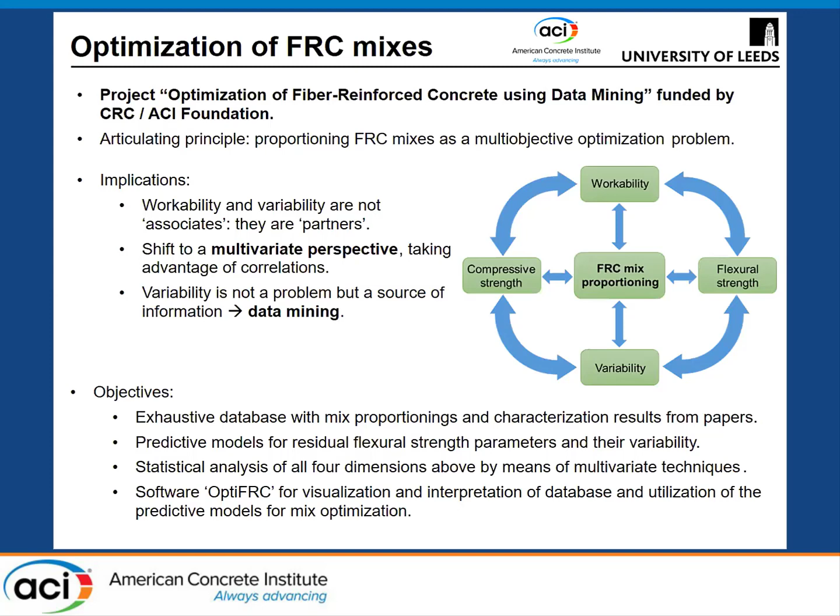The first objective was to compile information regarding mix proportions and their properties from previously published papers, and then use that information to derive predictive models, relating the residual flexural strength parameters of fiber-reinforced concrete and their variability to the proportioning of the mix. We can statistically analyze these dimensions together and derive models embedded in software that the final user can use as an optimization tool, but also as a learning or visualization tool to understand how mix proportioning and different FRC mixes work in terms of their properties and variability.

The outline of the project follows these objectives presented in the previous slides. Here's a flow chart: basically we dig up different published papers that have information about concrete mixes and their properties, and put that into an organized, consistent, coherent database. There's a lot of data mining and preparation going on to ensure consistency.

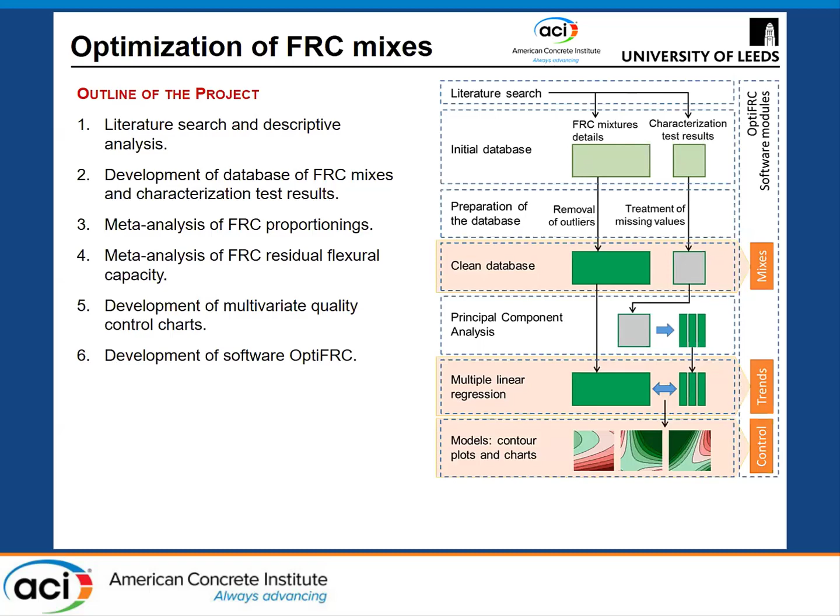We prepare the database, clean it, and once we have the clean final version, we start analyzing to obtain models that can be used for prediction as well as quality control and interpretation of general trends. The database collected for this project has been organized as different variables in parallel.

We have what I call the mix proportioning variables, such as cement content, superplasticizer, type of fibers, fiber content, length, and diameter. These properties define not only the relative amount of different constituents of the mix, but also their main descriptors—for example, the maximum aggregate size, the length and aspect ratio of the fibers, and the type of cement in a certain mix. All those are mix proportioning variables.

For each entry in the database, we also have variables related to properties—slump, compressive strength, residual flexural strength parameters. I've organized the database into two data sets: one for steel fiber reinforced concrete mixes, and the other for synthetic FRC mixes.

As you can see here, we have nearly 2,000 almost-complete cases of information regarding different mixes and their properties. There's a lot of variability going on, and that's when you can start capitalizing on that variability to extract information. That was the introduction to the project and why I'm calling this statistical learning.

In the next few slides, I'll show examples of modeling the relationships between the mix proportioning variables, because the first thing we need to do in data science, analytics, or artificial intelligence is understand the data we have. Before jumping to the main objective—predicting the properties of the mix based on its proportioning—I wanted to look at what the different types of mixes in the database look like.

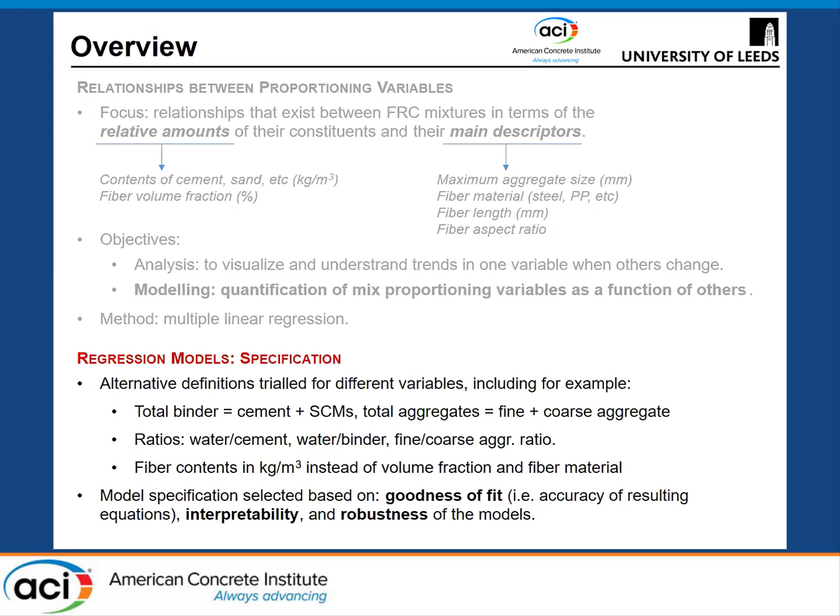That's also key. And in terms of robustness, we need to derive equations that are robust in terms of how they behave when we use different data other than what we used to derive the models. So looking at those three things, I started looking at different relationships that we could try to predict in the mix.

And the first one is the coarse to fine aggregate ratio. Why? Because I thought it's quite a good proxy to the grading of the aggregates in the mix, and that has a huge impact on the fresh performance, something we don't think about enough when it comes to fiber reinforced concrete.

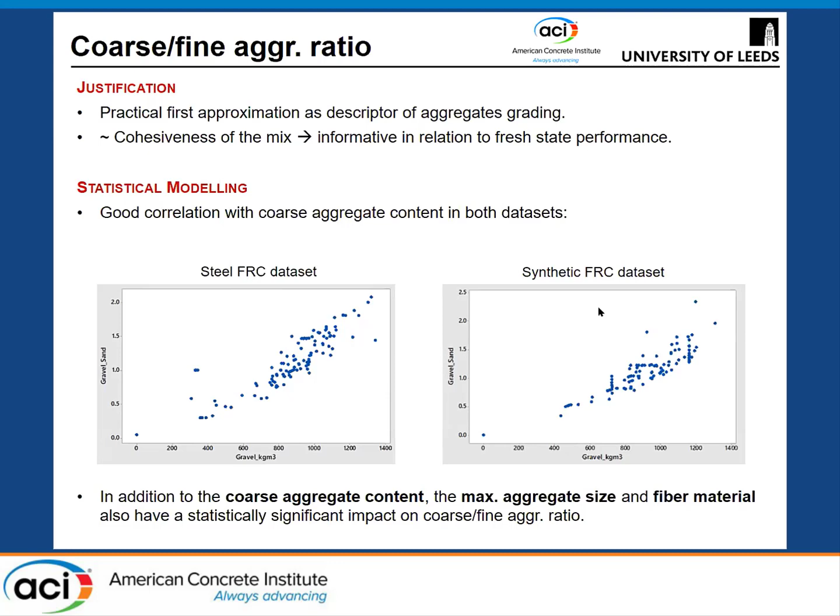If one plots the coarse to fine aggregate ratio in the database with respect to the gravel, with respect to coarse aggregate contents, you can see there was a very clear correlation, suspiciously clear correlation, just looking at the scatter plots. It's also affected by the maximum aggregate size and the fiber material in the mix.

So the regression analysis yielded these two very simple equations, which are actually very accurate, able to predict the coarse to fine aggregate ratio as a function of the maximum aggregate size, the coarse aggregate content, and also the type of fiber, since the equation is slightly different.

And then you can start producing plots like this, where you can try to explain why the mixes vary in this or that way, or why the people who have proportioned these mixes made those decisions, for example decreasing or increasing this parameter when we have different sizes of aggregates.

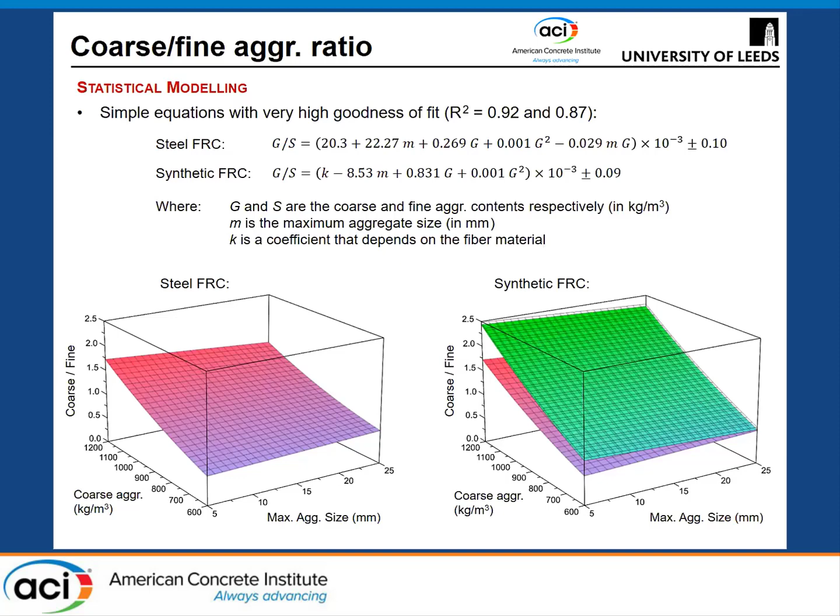Then, after looking at the coarse to fine aggregate ratio, it was also important to look at the total aggregates content. Rather than the total aggregates content, it worked better from the point of view of regression analysis, in terms of producing more stable and robust models, to use the coarse aggregate content.

And again, a regression equation was fitted to try to obtain the coarse aggregate contents as a function of the maximum aggregate size and the properties of the fibers in terms of their sizes and so on. Okay, fantastic. Thank you.

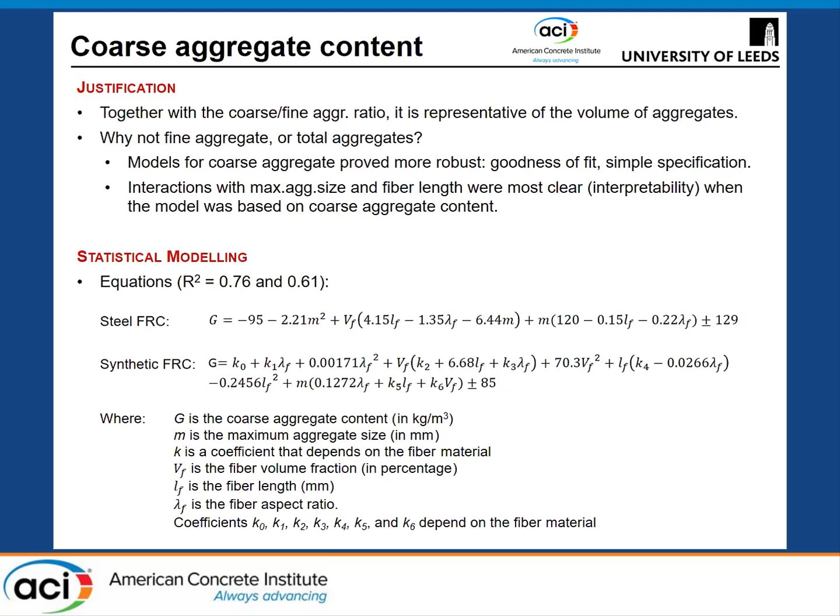With this model, you can obtain very interesting plots like this, where you can see a bit the trends that each—for example, this shows the coarse aggregate content depending on the fiber volume fraction and the fiber length.

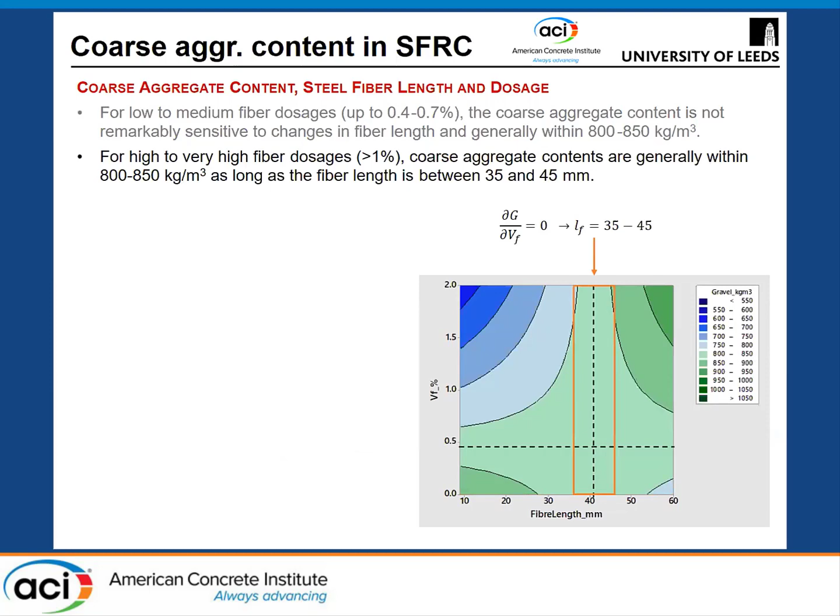There's different conclusions you can obtain by looking at these contour plots—I'm going to skip this part because I don't want to spend a lot of time, but again this is related to the interpretability.

Finally, we did the same with the binder content, trying to predict the binder content as a function of the other parameters in the mix. We obtained equations that were very, very accurate in terms of fitting the database.

Again, it's important to remember that these R-squared values look high, but this is even more significant when you consider that you're probably talking about mixes obtained from more than 100 different papers produced by different authors, and they are relatively simple.

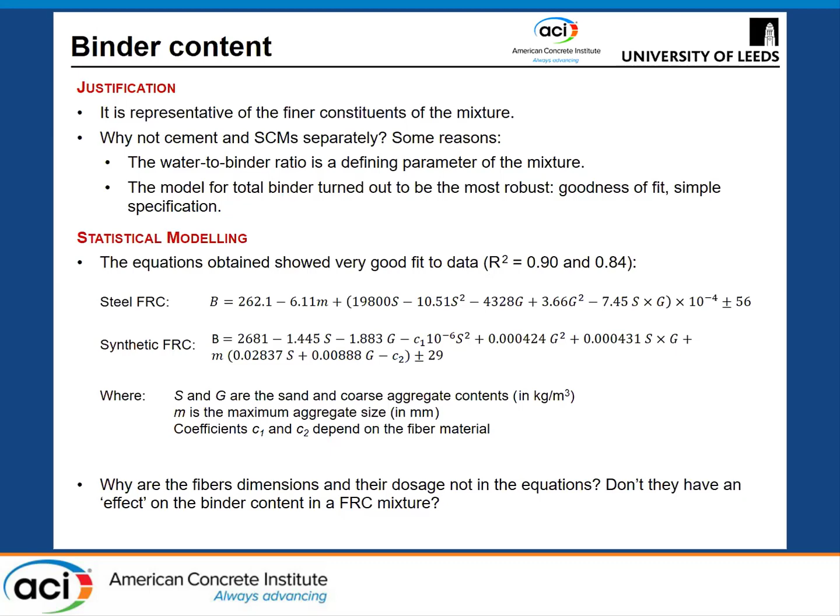So this is very powerful. But then in terms of the binder content, it was also interesting to see that the fibers were not in the equations explicitly, but the binder content was a function of the coarse aggregate content.

So in a way, when we organize these three equations that I've just told you about, you have one equation which, based on the maximum aggregate size and the size and dosage of the fibers, gives you the coarse aggregate content.

Then you have another equation that gives you the coarse to fine aggregate ratio. So based on those two parameters, you can directly obtain the sand content.

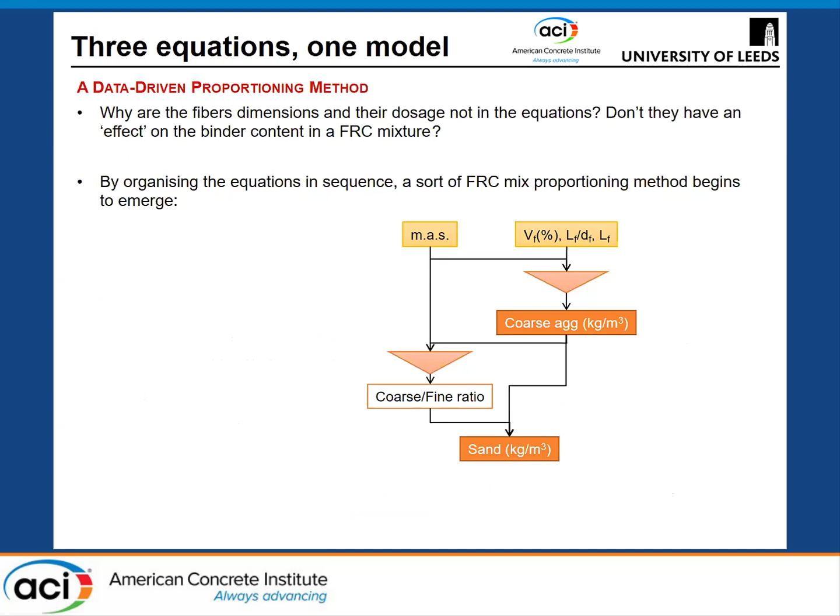And once you have these two, using the third equation that I presented to you, you can obtain the binder content. And you can see that the fibers affect the coarse aggregate and sand contents, which in turn affect the binder.

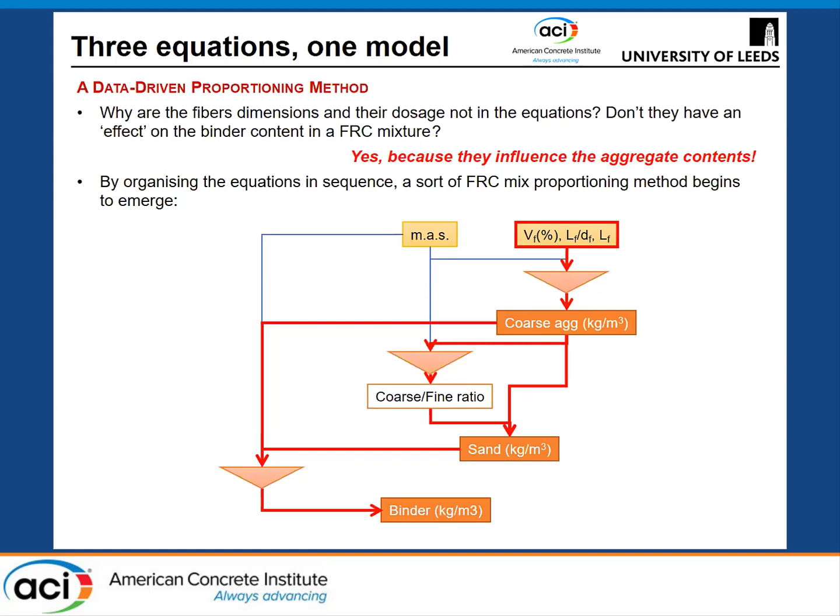So yes, they are influencing the aggregate contents. I'm going to try to cover these slides in 2 minutes, so I'll probably skip a few of them because I'm conscious of the time.

The next step was to try and relate that information about the proportioning of the mixes with the properties, focusing on the flexural strength only. It was important to pay attention to the interactions between the different variables.

It took us quite a long time to get to formulate an equation like this. Basically, we have 4 different residual flexural strength parameters, and we obtained the same format of equation for all 4 of them.

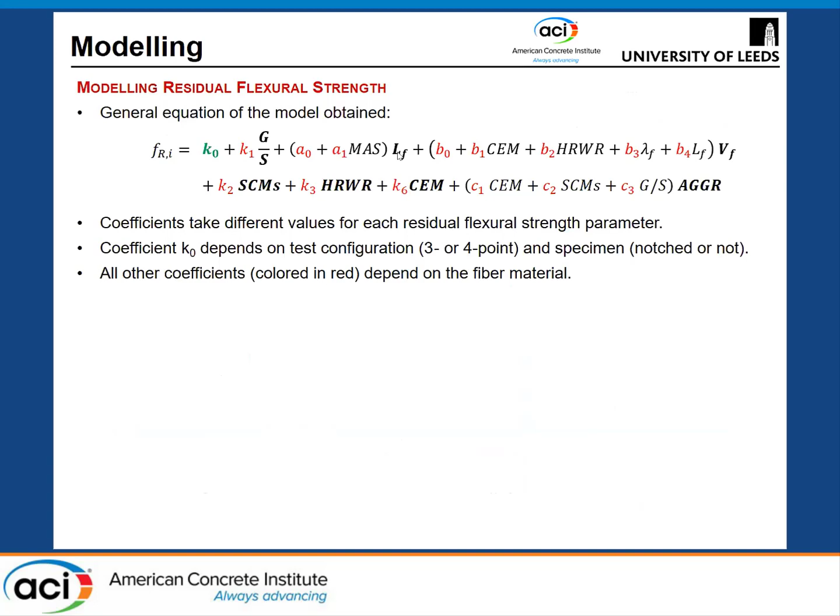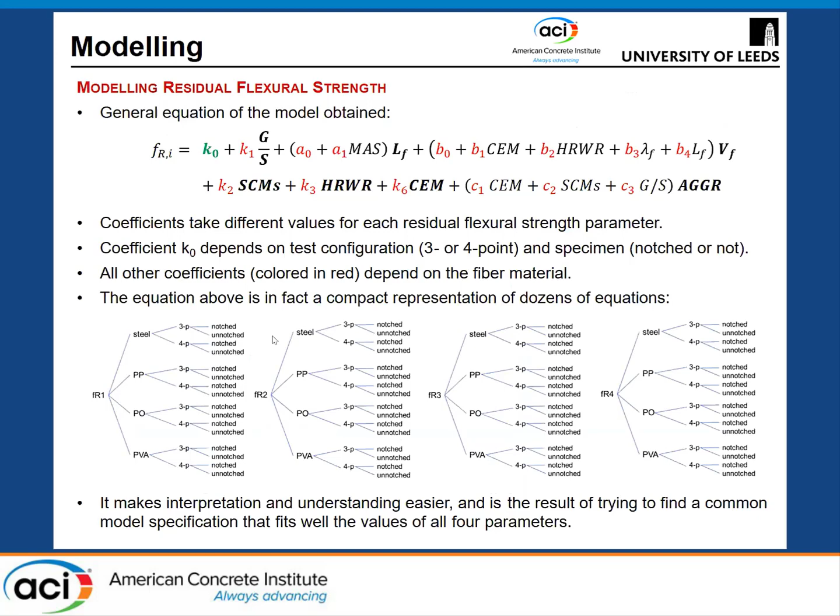It's simply a matter that for each of the residual flexural strength parameters, the coefficients in red in this equation are different. So basically, in one equation we were condensing dozens of equations for different cases, and all of them can be plotted automatically.

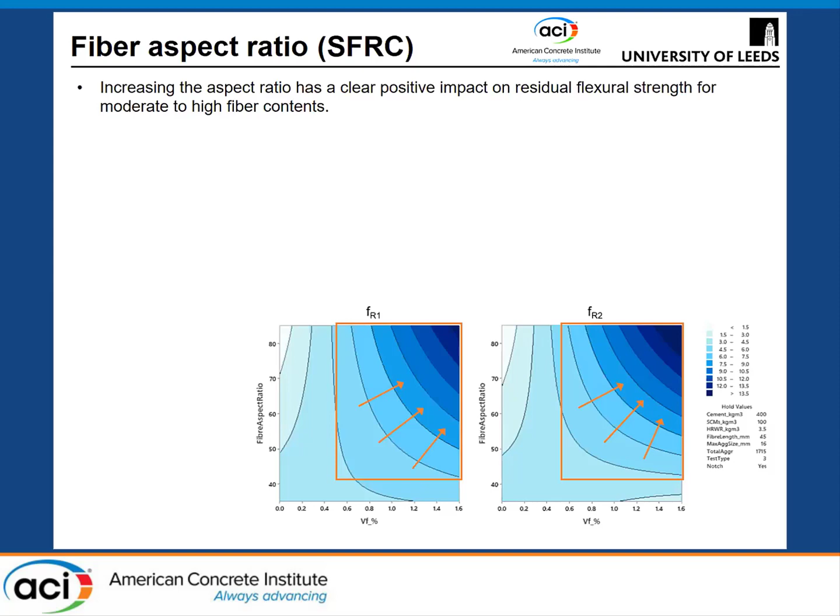For example, here you can see for FR1 and FR2 the plots showing the effect of volume fraction of fibers and the aspect ratio. These are just a handful of plots that can be generated using these models, and a few of the conclusions that, unfortunately, I don't have time to emphasize here.

But I will finish with the closing remarks, because this was just a quick example of what statistical learning can do for you. It's not only that the equations or software we end up programming learns from the data, it's also that we need to enjoy the journey and use this process to discover and learn ourselves.

In the case of this project, which is an ongoing project funded by the ACI Foundation, a database of almost 2,000 cases has been compiled, and the regression analysis has yielded models that are useful to obtain accurate estimates, as well as a very good tool to better understand the interactions between the different parameters.

A unified predictive model for the residual flexural strength parameters is possible, and using these models, you can optimize the proportioning of your mixes.